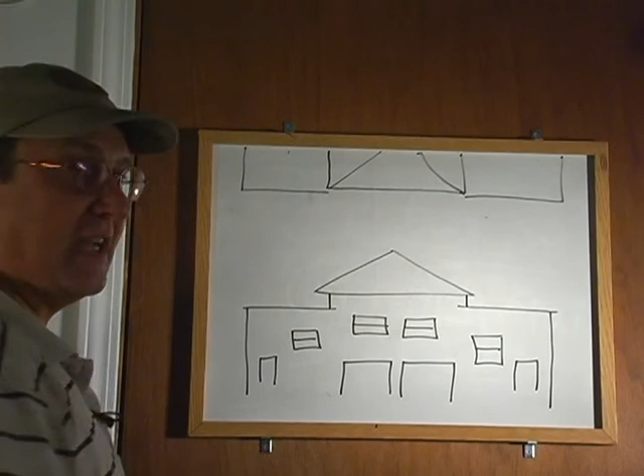I've got behind me a sketch of the duplex. This here is the front view, so if you stood out by the road looking at the house, this is what you would see. You can see that it's very symmetrical. What you can't tell from the sketch is that there's actually a gutter here and a gutter here.

Right here there's actually a downspout on each side, which we're going to also pick up because we like to clip the gutters and then tie wrap the downspouts. And so you can see right there we've already got sort of an outline started.

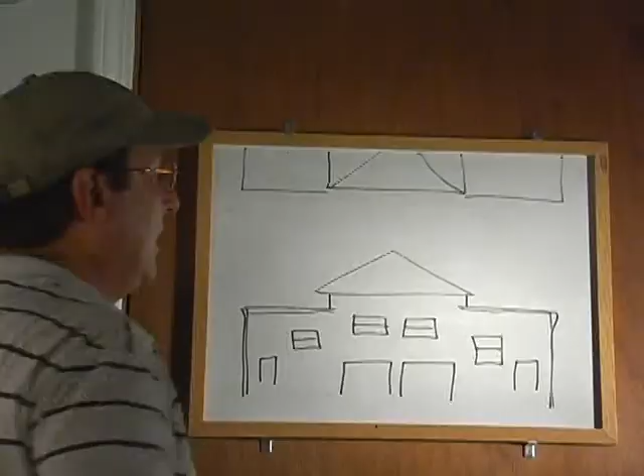Another thing that we're going to do is there's also a gutter that goes across here that we're going to light. We may put a whole separate string of lights right on this peak. The way this is set up, and I should actually finish this drawing because I don't show the lower roof, but there's this lower roof right here.

Whereas when you look at either side of the house, it's a gable roof, you know, it's like an A-frame. Whereas this very top part is what they call a hip roof. Well, you can see it here from the top view.

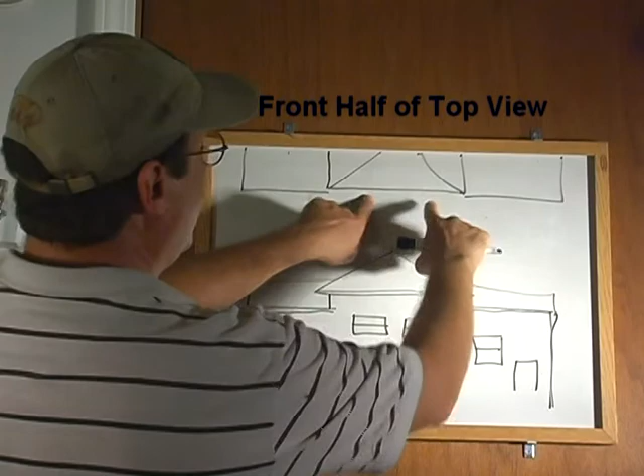You know, here's our front doors, here's our garage. Basically we're just taking this and spinning it on its side, so to speak, so we can look straight down at it. Up here what we're doing is just looking at the front half of it because we're only lighting the front of the house, so we don't necessarily care what's going on in the back.

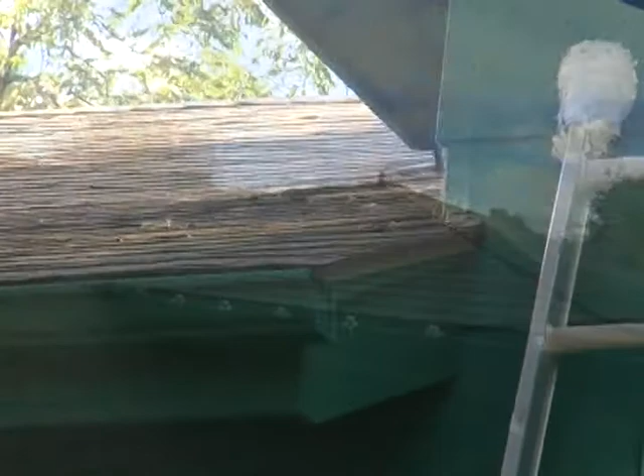This gutter here actually continues in back to this lower roof, so it goes back probably about that far, probably about halfway. The reason I'm focusing on the gutters is because we like to clip the gutters, as I've said many times before. So what we're actually going to do is we're going to design a system that's got lights clipped to the upper gutter.

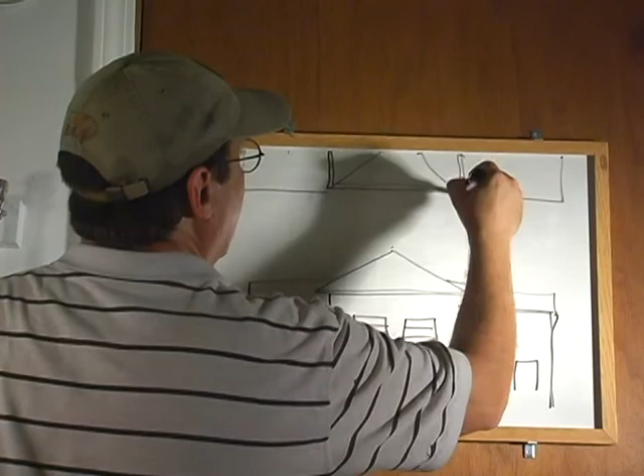Then we're also going to do this gutter here, which of course is the same as this gutter here, but then pick up the downspouts.

Now, one of our considerations is that we're going to have a timer in this garage here on this side. And so all the wires are going to have to come into the garage here on this side. Any wires that are on this side of the house, we don't want to run across the ground because it has to go across the driveway.

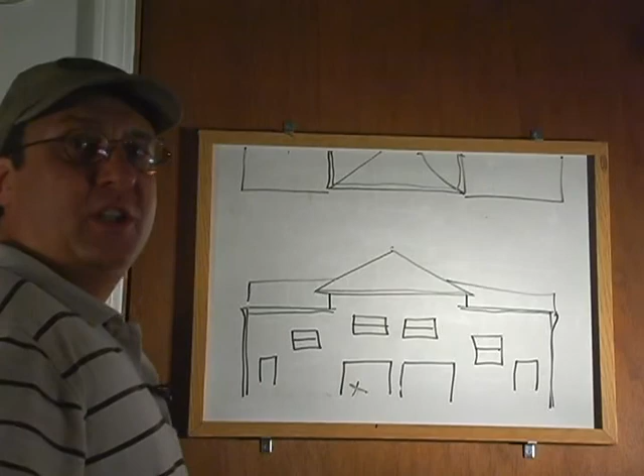Or maybe you could go back up around the garage doors if you had to and sort of staple it or tie wrap it up there. But ideally what you would do is you would design your system so that when the light strands come down off of the house, they come down over on this side.

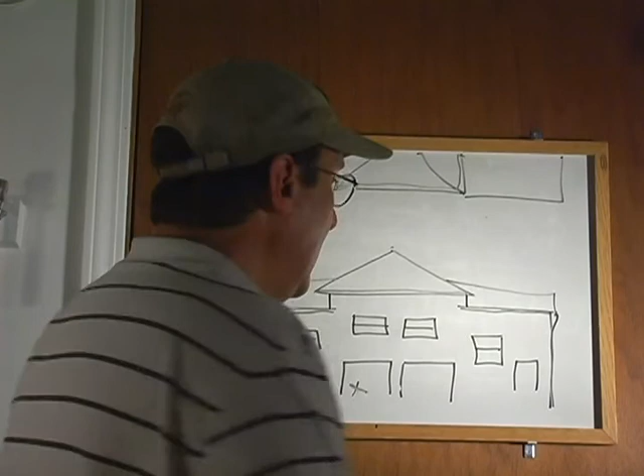So what I'm going to do, I'm going to get a different colored magic marker here. This red line will represent the actual lights. What I'm going to do is I'm going to make it to where there's a run of lights up this downspout.

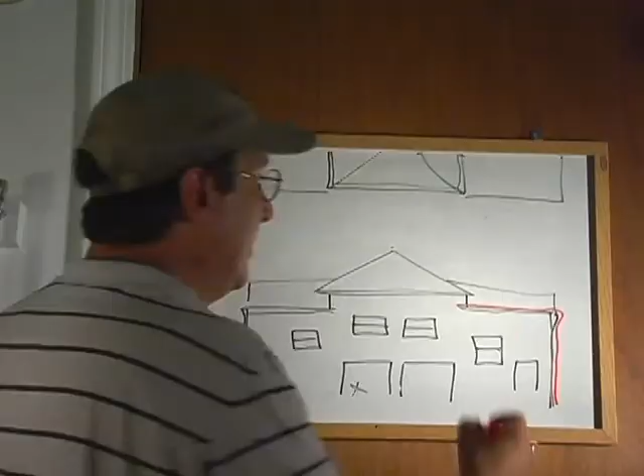It's going to continue across this gutter, and then it's going to not really stop, it's going to jump up to this gutter. It's going to jump up back around to the back side of it and then come down and across, and then at this point it's going to come down. Let me draw that same thing here.

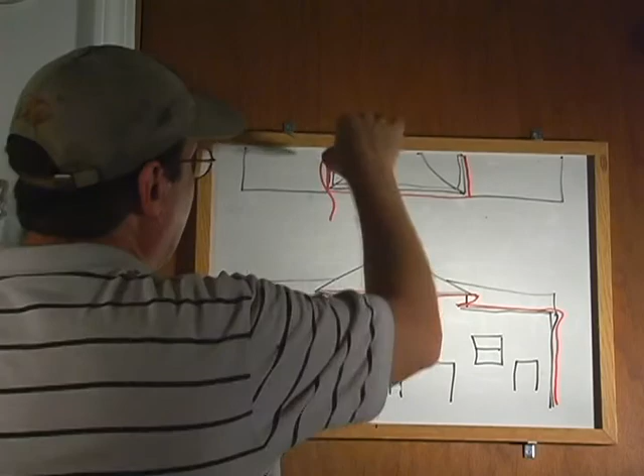So where this comes down, it's actually going to come down like this into the garage. What I'm going to have to measure is all of this distance and this distance, and see what that length is, and make sure it's not past my 125 feet that I want to stay within.

Because remember, I'm using 1 foot spacing, 5-watt bulbs. I've determined by building in a nice safety factor that I don't ever want one single strand of lights to contain more than 125 bulbs, with a 5-watt incandescent bulb.

By wiring it this way, that allows my cable to drop down right next to the garage where the timer is going to be. I'll also, of course, have a second strand of lights that will come up the opposite side downspout, across the gutter, and then drop down with this one.

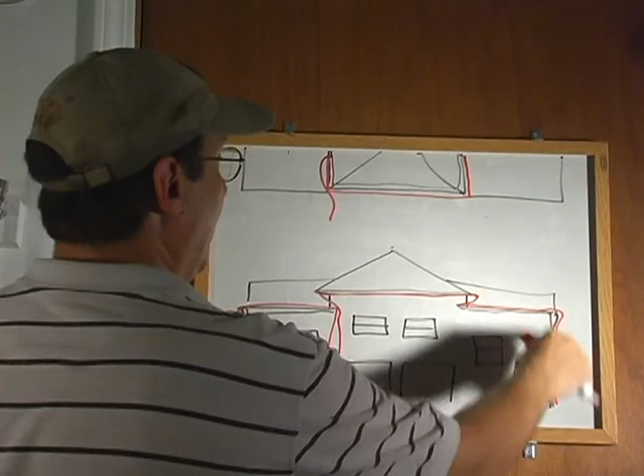Of course, I'm going to measure everything first. I'm going to end up with the downspouts, the gutters, and then the upper gutter, but this being one strand and that being a shorter strand.

I'm also going to show you how to do lights around windows. I'm going to do these 2 windows using one technique, and these 2 windows here using an entirely different technique. Then I'm going to actually put lights around the garage doors and maybe use an entirely different technique again. So when we're all done, it's going to look something like this.

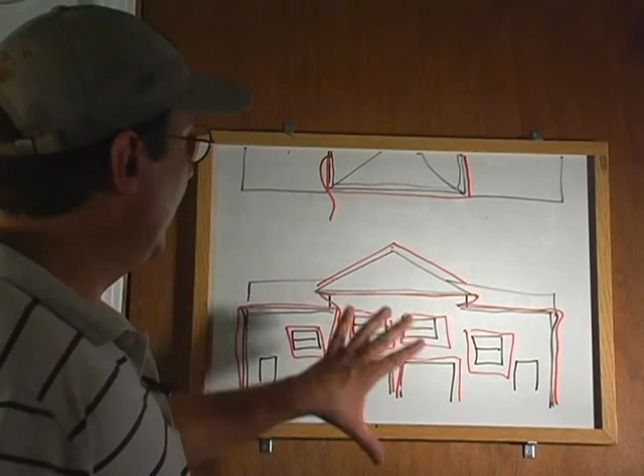Now, one thing that I've already done is I've already measured this shorter piece. I went up and measured what it takes to go across this gutter, down the downspout. One thing that I decided to do when I was measuring, right here next to the front door, there is a wrought iron handrail on either side of both of these front doors.

And then also, by the way, there's some steps that lead up to the front door, which is why there's the handrail, because it's steps and a little porch. Of course, they always put a handrail on that, right?

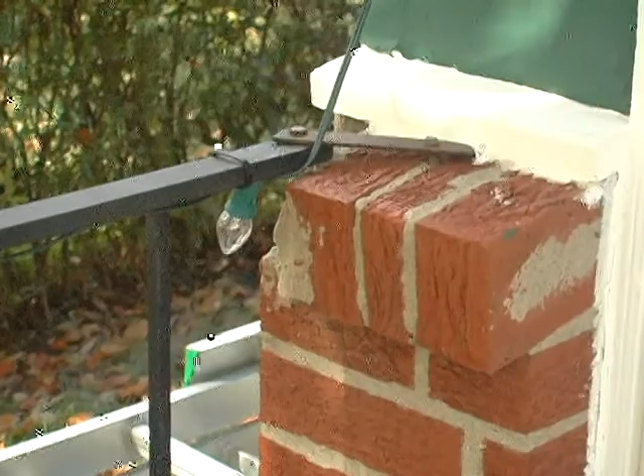So what I'm going to do is, instead of going all the way to the ground here, I'm just going to tie in to the handrail. Not really tie in, but just sort of pick up the handrail, and I'm going to tie wrap lights to the underneath side of the wrought iron handrail, so that will be one continuous loop.

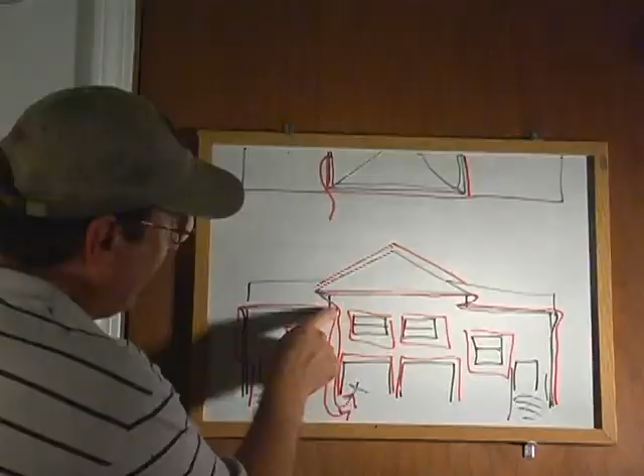I've also already measured the lead cable, which is basically the built-in extension cord. It's made out of the same wire that your regular light wire is made out of, but it just doesn't have the sockets mounted to it.

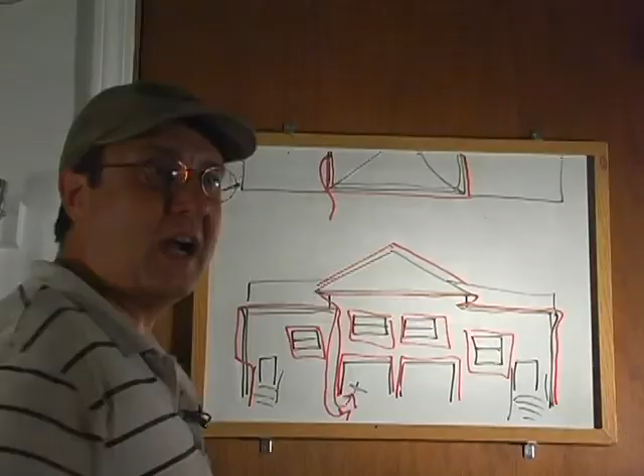So I'm going to go ahead and splice in a section that I measured to be 25 feet. Based on where I'm putting the timer in the garage, the timer's going to be 25 feet from this point. And that's, of course, factoring in not just a straight line distance, but dressing out the cable, putting it back in the corners and the edges so that it's out of the way.

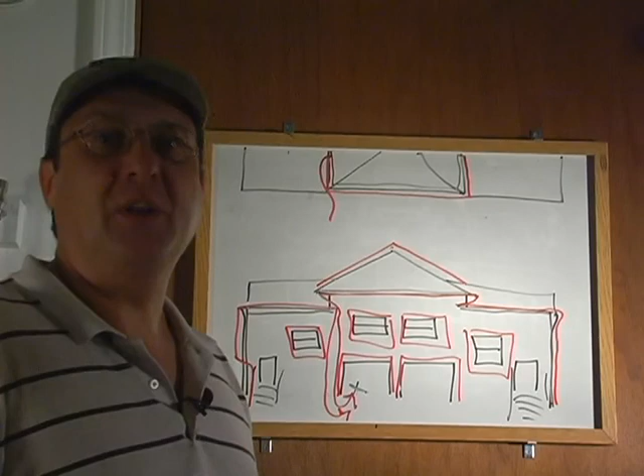Again, measured 25 feet. I'm going to go ahead and cut that cord to be about 30 feet long because I want a little bit of extra room to play with. If I end up with any extra cord, it'll just be spooled in a little pile underneath the timer. I just want to give myself a little flexibility in terms of where I place the timer—I might want to stick it on the wall over here or over there, or lay it on a table. I just want to have that flexibility to move it around.